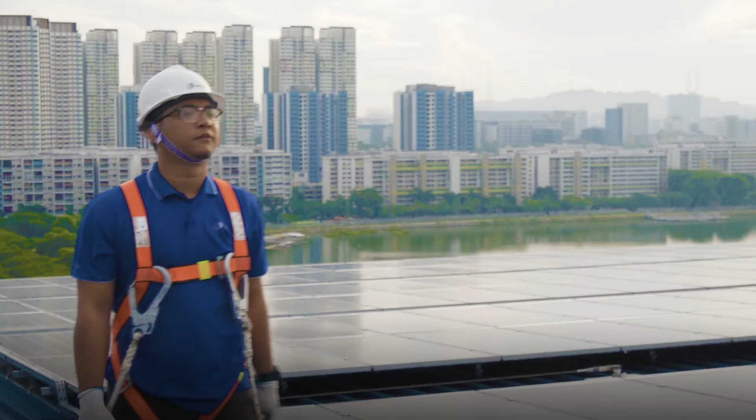I'm from the Energy Research Institute of NTU, managing two programs directly related to this workshop. The first is related to multi-energy, and the second is about the power grid. Why present these two programs together? Because tomorrow you'll see that the power grid, districts, and large sites are somehow connected and interlinked.

The first program relates to districts or large sites hosting different energy types and sources — that means renewable and non-renewable, power, and thermal energy — with the following question: how can I reduce my CO2 footprint? How can I cut my cost?

The second program is about the integration of renewables in the grid. Integrating renewables in the grid is not an easy story. There is a limit somehow, and it creates a lot of instability. So the question will be: what is the impact of renewables on the grid, and how will the grid behave?

We also have to look at it from a business perspective — are there new businesses coming in with this big change of paradigm in the grid? The presentation will cover, and I hope answer, most of these questions. What's nice is we'll see the concept, but not only the concept, also the implementation — that means we'll have the voice of the project managers who are today implementing these projects. I truly believe it will be a very fruitful session, and I'll immediately introduce John.

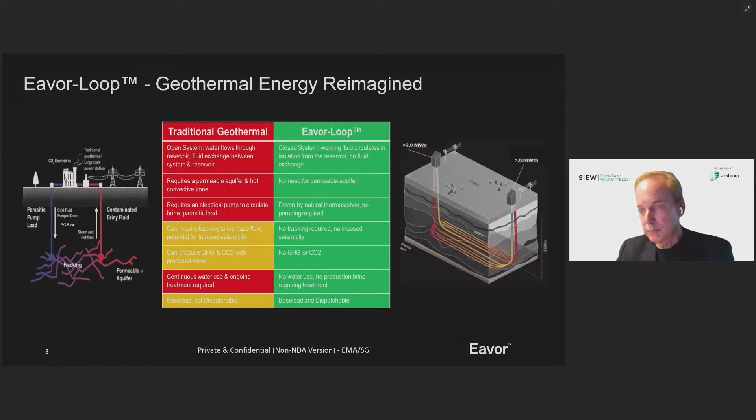And the subject of a much, much longer presentation than the 5 minutes I have today. Next slide, please, page 4.

Thank you. The end result of all this development is the creation of what we feel is a previously unknown energy category that is simultaneously truly scalable, green, and baseload. No other energy source does this.

And on top of this, unlike any other green solution, ever intermittent, it can act as baseload, even better than that. And unlike traditional geothermal, it's even dispatchable and can load follow, which can certainly help with grid stability, one of the things you were just mentioning, Sharif.

In fact, with no emissions, no water treatment, no seismicity risk, and a small surface footprint, it's the most benign form of energy imaginable. Being benign and scalable also makes it distributable, another virtuous attribute.

Similarly, being distributable, black start capable, and mostly buried underground, it's also an extremely resilient form of energy against natural disaster, man-made or natural disasters.

Finally, unlike wind and solar, it can effectively deliver heat and/or electricity, not just one of the others. It truly is the holy grail of energy sources. Next page, please.

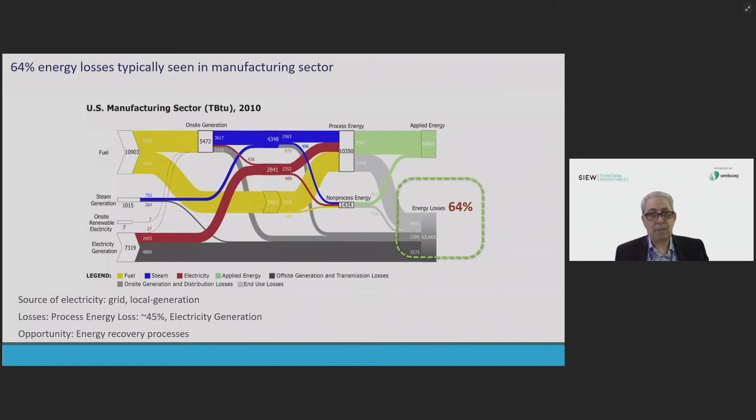And when you put all this together, you see that we lose 64% of our energy. So what can be the value proposition? We have to find a system that enables us to completely manage all these energies as a whole. That means we have to find a way to couple them.

So we have developed a system that I'm introducing called Smart Multi-Energy System. This system will have the mission to be able to dispatch energy, or the mix of energy, to reach an acceptable cost and to reduce the CO2 footprint. That means the system will give orders to the different sources of energy, alternatively, in parallel, or sometimes together, to supply the power to reach the minimum footprint of CO2 and obviously of cost.

So the project we have decided with Jurong Port, with JP, we have 3 targets: energy saving 20%, cost saving 30%, and CO2 footprint less 20%.

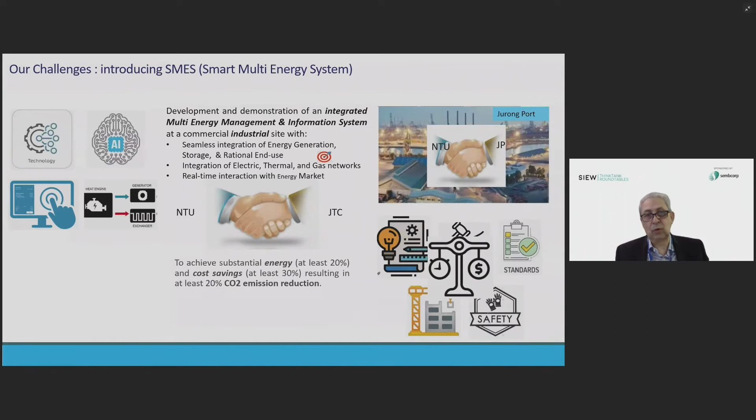So just a picture of a harbor. It's a multi-purpose harbor, 40,000 vessels a year, very big land. But what you'll see when we go into the harbor is how rich this harbor is in terms of load for us. The harbor is also 16 megawatt, but notice that 10 megawatt are coming from solar. So it's a very peculiar harbor. We'll go more in detail later in the presentation.

So what is the solution? The solution obviously comes into 3 parts. I will call it a software suite. Today, the system is not a prototype - we are not speaking of prototype. The system is running in Jurong Port. So the system has 3 pieces. The first piece is the design.

So we start to plan. We want to reach some targets in terms of CO2, in terms of CapEx. We have to reduce the CapEx, and in terms of operation we have to have the lowest OpEx. And we have to find the best acceptable efficiency, taking into account the CapEx and OpEx we want to reach, and the CO2 footprint that we want to get.

So first, we have a first tool. This tool is capable of helping us design our site and make the choices in terms of what different pieces of equipment will contribute to the targets. So the first one is a design tool. What is the output? The output is a bill of material with a list of equipment reaching the CapEx, the OpEx, and the CO2 footprint that you want to get.

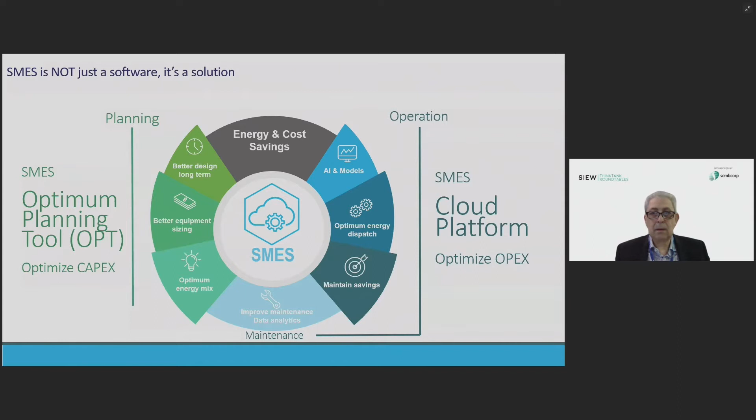On the other side, we have many rooftops with up to 9.6 megawatt peak solar power. We have obviously a storage unit with batteries. We have an AC/DC grid, so we have protection with AC circuit breakers. All this has been developed by ERI@N. We have obviously a PV optimizer. And we have a microgrid controller.

And then we are also experiencing trading of energy. So we have the grid, but also we have solar PVs - Sembcorp is our partner for the solar energy. And then we have also a gas pipeline. We have a cogeneration, and with the cogeneration we have also an absorption chiller and thermal storage. And here you see really a real example of multi-energy, multi-sources.

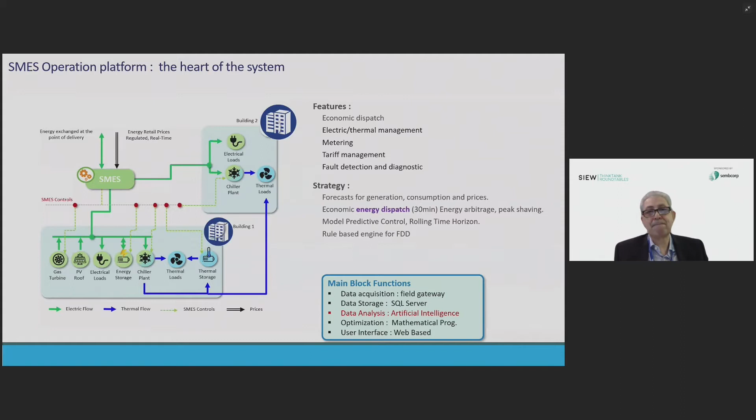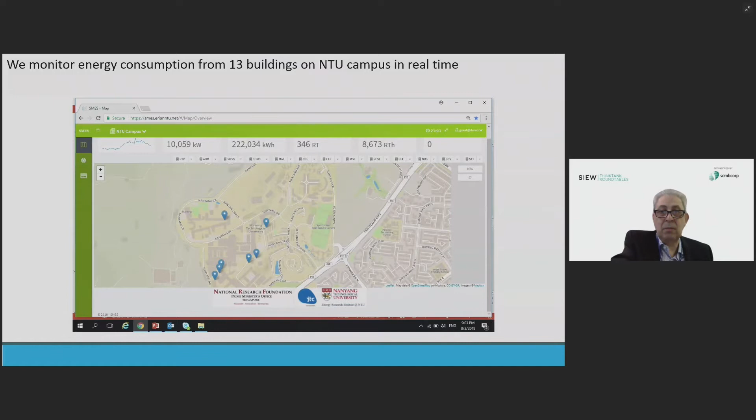So we can see one building with the sum of power consumption and whatever on the building.

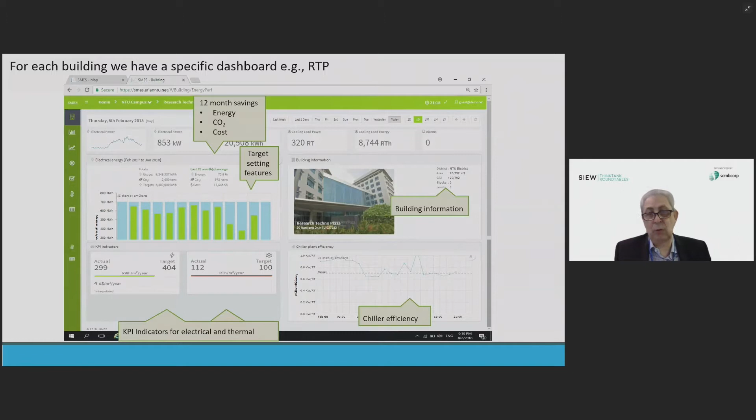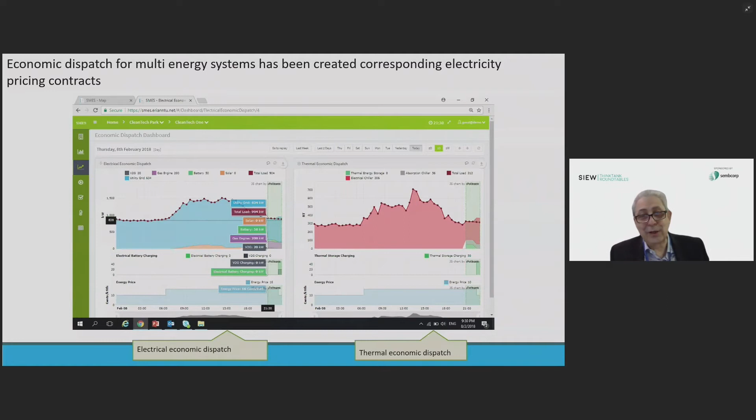I believe the next slide is about the accuracy. So here you can see the accuracy - we are very good in our forecast. Obviously the solar forecast is definitely not at the same accuracy as the load and supply. But this gives you, in a nutshell, a quite clear view of our project.

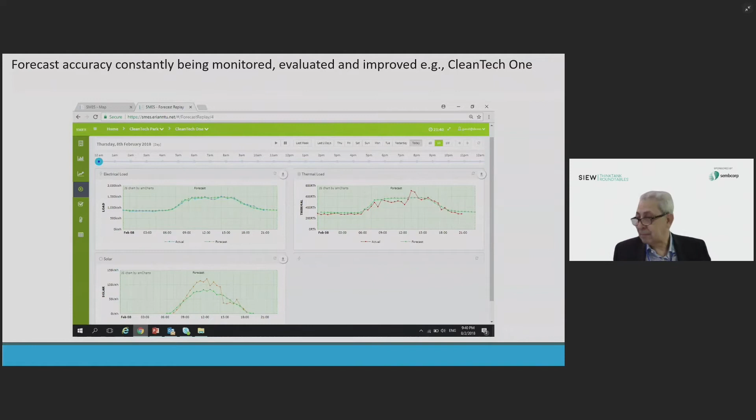I believe my time is up, and it's time to ask Mr. Parik to make his presentation. Very quickly, Mr. Parik is a senior manager in Jurong Port. He's our day-to-day partner in this project in Jurong Port. He's at the heart of the design team, and also at the heart of what will become Jurong Port in the future - he'll explain it better than me. It will become a living lab for all Singapore to conduct thermal and power experiments. He'll be covering the topic of the next generation multipurpose harbor, because we are really into the future once we are into JP Jurong Port.

Go on, Parik. Hi, good morning all. I would like to thank NTU as well as EMA for inviting us here and sharing our journey about innovation and sustainability. Next slide, please.

The presentation today is designed to give you context of the port first, so we'll help you understand the energy landscape in Jurong Port, and then we'll talk about how we have approached innovation and sustainability in terms of application at both micro and macro level. Then we'll talk about SMES as a key vector for making Jurong Port a next generation multipurpose port. This is to give you overall background - I think Sheriff has really articulated SMES very well, so I'm not going to delve too much into the detail, but generally this should help you understand the overall project itself.

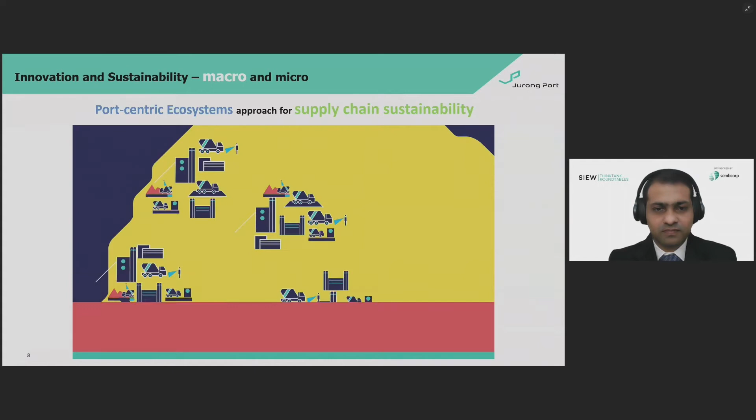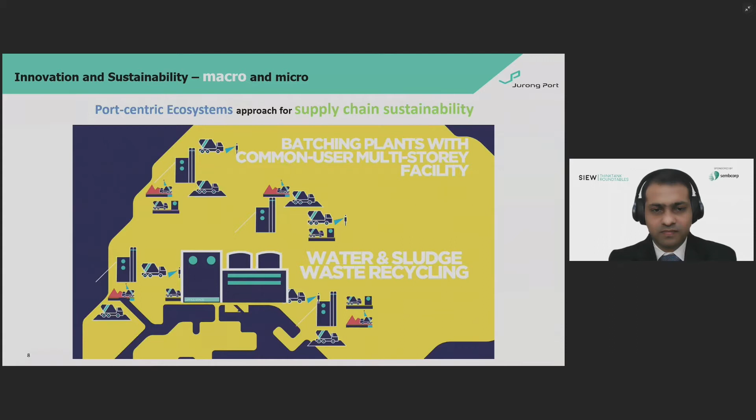Through a one-stop facility, JP will integrate and provide a common user, multi-story facility for shared requirements such as office space, water and sludge waste recycling, weighing, truck washing and maintenance areas, as well as parking spaces. With such a facility, port users can tap on economies of scale to invest in next-generation automation and environmental technologies. By providing an efficient and enclosed storage under shelter for aggregates, this will further reduce land usage by about 5 hectares.

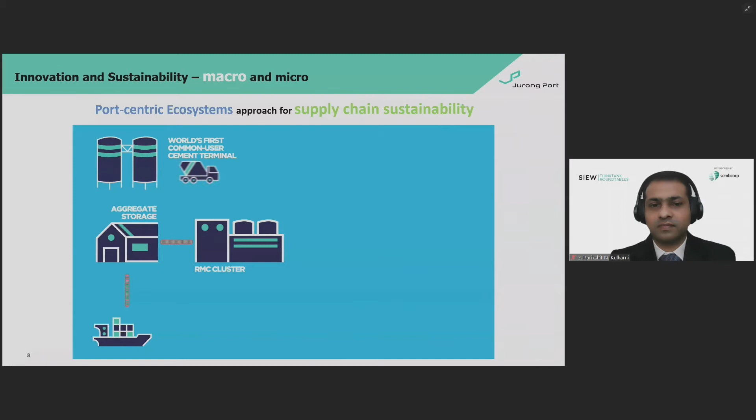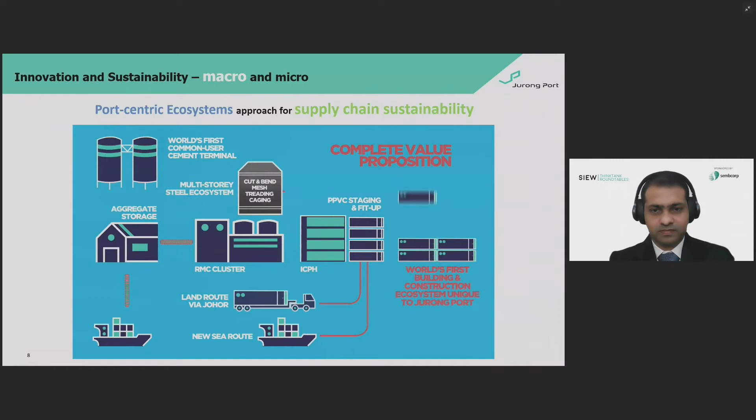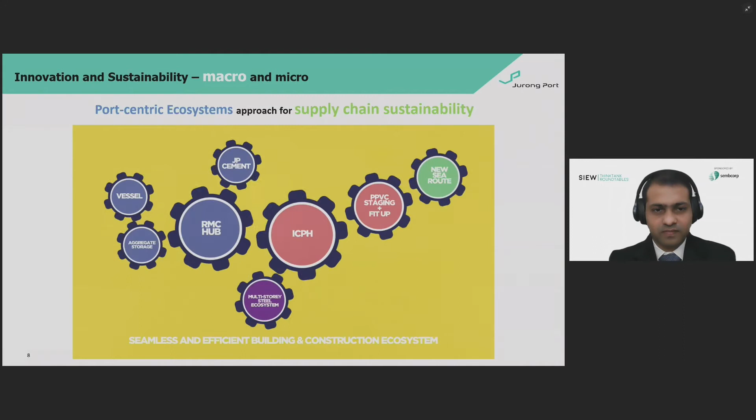JP is the expert in advanced bulk cargo handling methods. Fully enclosed and highly automated conveyors will fetch cargo from the vessels directly to the facility. Dust control systems will minimize any pollution. With cement, aggregates, batching plants, and all other necessary requirements connected to each other, Jurong Port's ready-mix concrete ecosystem will pave the way to transform Singapore's building and construction sector by leveraging advanced technologies. In future, the facility can scale up and reap even greater synergies with prefab and steel clusters. The RMC ecosystem, creating value for Singapore's construction industry.

Yep. Thank you, guys. Hope you can hear me again.

In this particular video, you would have noticed how bringing up different industries nearer to the port has strategically helped reduce so many truck trips. In fact, just for this case of RMC itself, it's about 600,000. But as we develop more ecosystems like the steel that was mentioned, and PPVC and prefab hub, we can easily cross more than 1 million truck trips on road. And that really translates to a lot of carbon emission savings here. Now, this is a very strategic approach on a macro level.

Another example, if you can click the next slide, is this study and venture that we have now gone into together with Chiyoda and 6 other corporations, which is looking into hydrogen as a next generation fuel. And again, Jurong Port being, like what Sheriff had mentioned, a living lab, we are now joining hands with the industry to test bed and also to look at how hydrogen can be landed in Singapore. And with this, basically, we can make the grid itself cleaner.

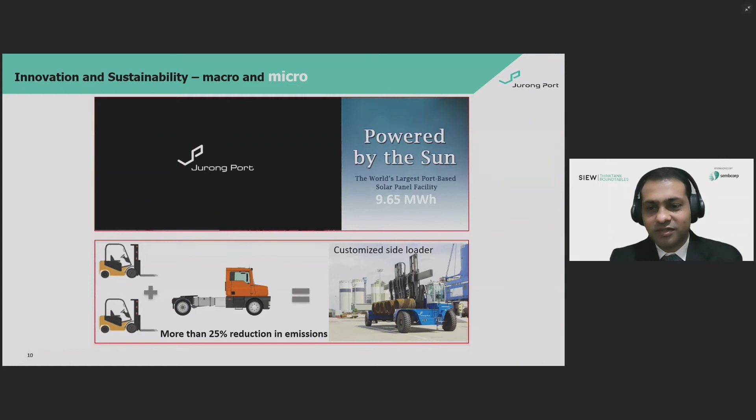This is where I'm going to talk about how SMES has played a key role in making Jurong Port the next generation port, because as we operate this 155 hectare facility, we need to understand the DNA of energy inside the port, and this is where SMES comes really handy.

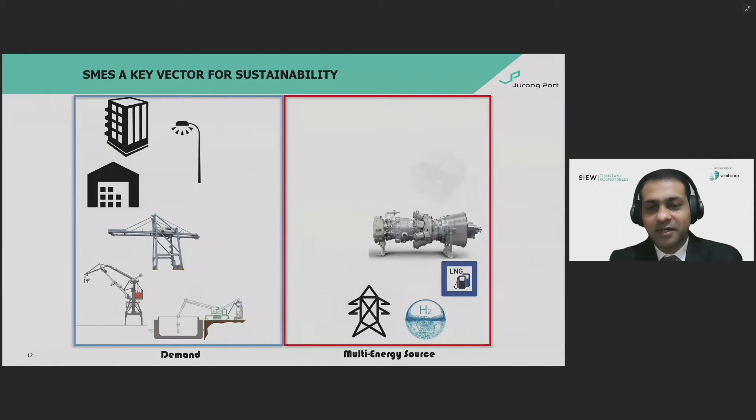So you can see now on the right side in the red box, how we are going to look at various energy sources, which can then combine together as a power bank for us to be activated through the response and demand from the energy market and the data that we receive, which will be processed in a central platform, which can then help us make business decisions that are driven and supported by the data and analytics from SMES.

So this is exactly where we are coming from. SMES is going to be the platform to give us the insight, both predictive in terms of our energy loads that are going to happen, and make the right decision based on the energy market prices every half an hour.

And make that call to then see whether we run our gas engine, or buy from the grid and use it to charge our batteries, or pump our solar into the grid because the grid is paying better. And this is exactly where what Sharif was mentioning about reducing carbon is one aspect, where we can introduce hydrogen into the system.

We can harvest solar in a much more efficient way. That is one part. And the second part was actually making business decisions which are data driven in order to then have, I would say, commercial savings.

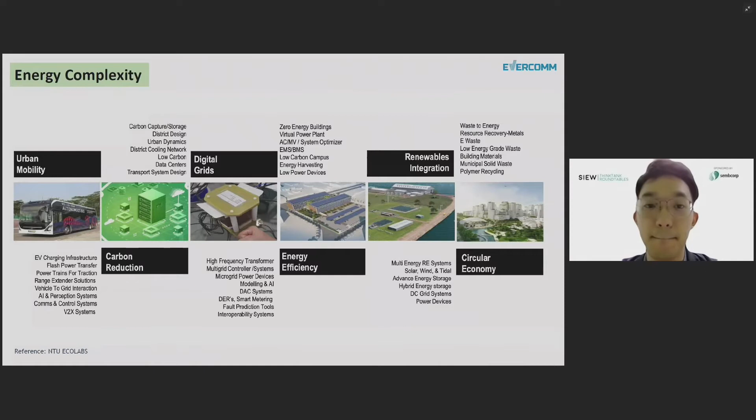One of the projects that we have done is actually with ERIAN, as well as a public listed company from Taiwan. They're one of the largest power electronics and power supply manufacturers.

As a company entering into this space, we realize that hardware, physical hardware, at the end of the day, are the enabler pieces for a lot of these software abilities. Even without these enabling hardwares, a lot of the things we want to do at the software level will not be able to translate into real savings or real output.

But if we as a company want to directly work with a lot of these bigger conglomerates, it will be almost impossible. This is where you can leverage on an open system innovation approach by partnering up with universities like NTU and ERIAN, and working with conglomerates who are very strong in power electronics and power supply products, while a startup can come in to focus on the software aspect and the innovation business model. I think this kind of collaboration can really shorten the product to market phases.

So in this particular collaboration, we're developing bidirectional inverters that can help us better do a lot of the market trading activities when the market begins to open up.

In terms of the scope of the collaboration, the main IP actually comes from the universities, and the startups are much stronger in developing platforms, software, and algorithms. The big manufacturing companies are really good at cost down and making sure the hardware prototype can really be scaled for, and be ready for design for manufacturing.

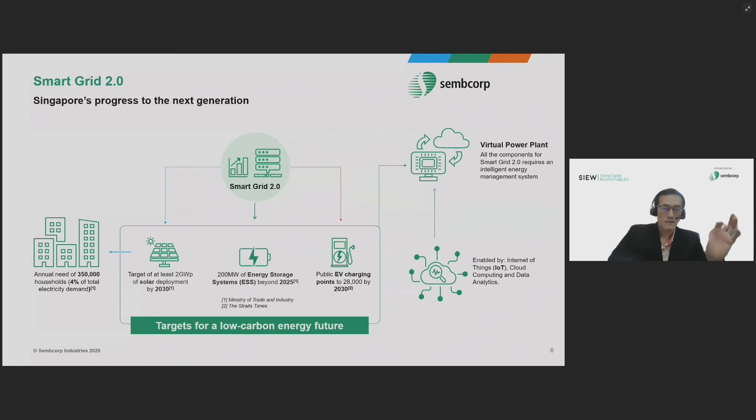In a nutshell, the virtual power plant that we envisage centers on aggregation. What are we trying to aggregate? We aggregate idling assets that are not able to participate in the market efficiently or cost effectively. If we build a digital platform to accumulate these small idling assets and enable them to participate in the market, that will save a lot of potential investment and land area, and also improve the quality of electrons that consumers enjoy.

I have a video to fully describe the virtual power plant we are developing together with our partners. So, the video.

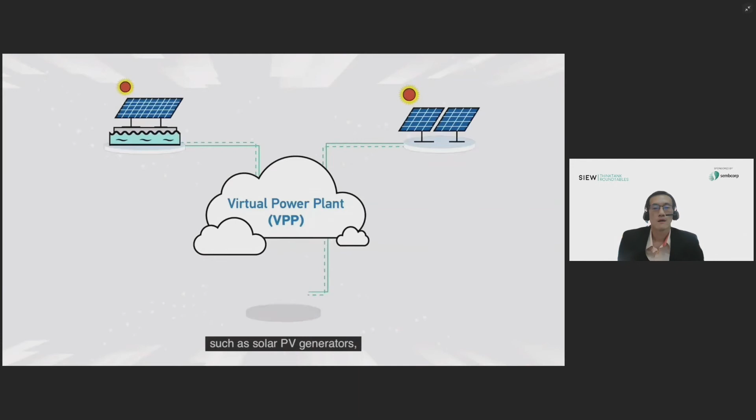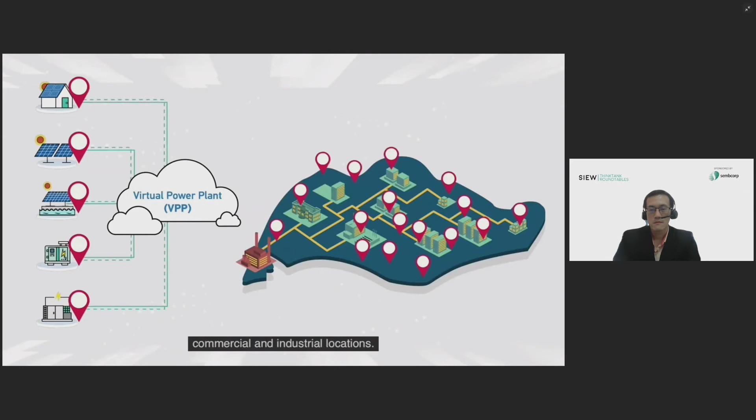A virtual power plant aggregates and manages distributed energy resources, known as DERs, such as solar PV generators, energy storage, and gas generators, as well as building loads. Up to thousands of these assets can be scattered across residential, commercial, and industrial locations. This portfolio of energy assets, combined into a single entity, operates like a conventional power plant.

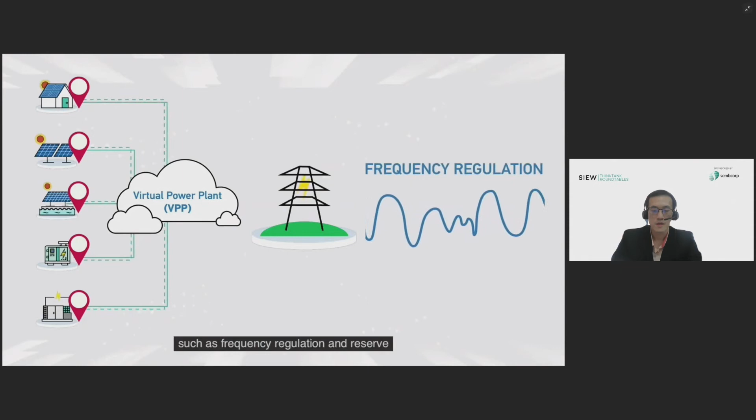It brings new opportunities to DERs by allowing them to participate in the energy market, including grid ancillary services such as frequency regulation and reserve, to enhance grid stability. A virtual power plant brings value to the regulator, asset owners, traditional utility companies, and the consumer.

A VPP facilitates a more diversified and dynamic energy market by enabling cleaner energy sources into our energy system. For asset owners, a VPP captures more value from DERs by enabling market participation, thus bringing higher returns and encouraging investment into renewables. The VPP enhances grid stability with services to better match supply and demand, allowing traditional utilities to better plan and optimize production efficiency. A VPP increases DER returns, thus encouraging more renewables installation, leading to a cleaner and more sustainable energy supply, ultimately benefiting the consumer.

Energy Market Authority of Singapore and Sembcorp Industries Limited, in collaboration with the Energy Research Institute at Nanyang Technological University, have embarked on building Singapore's first virtual power plant. This project aims to contribute towards Singapore's efforts to meet its climate change commitments by allowing more clean and distributed energy resources, such as solar, to be integrated into Singapore's energy mix.

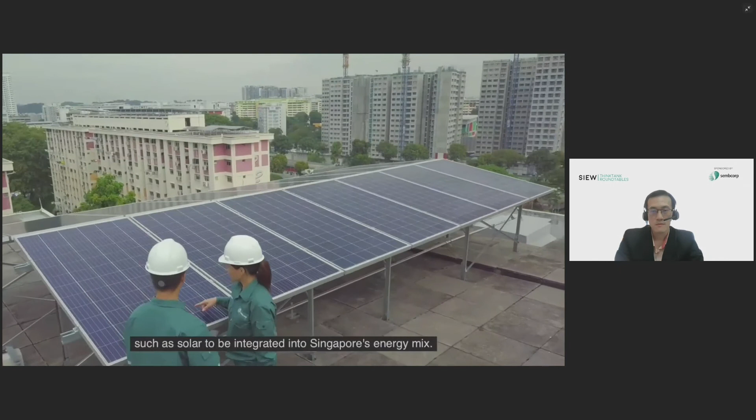Our research leverages recent developments in information technology, such as large data transfer in real time, advanced forecasting with smart algorithms, as well as innovative strategies for optimum dispatch. Using data science and machine learning algorithms, we target more accurate predictions for solar power generation, building load demand, and electricity price forecasts.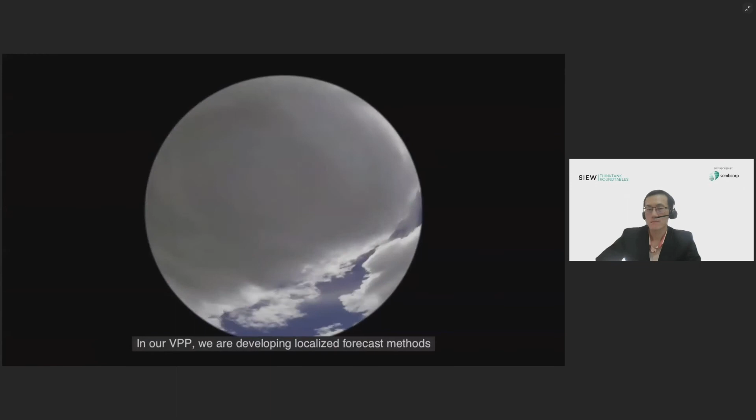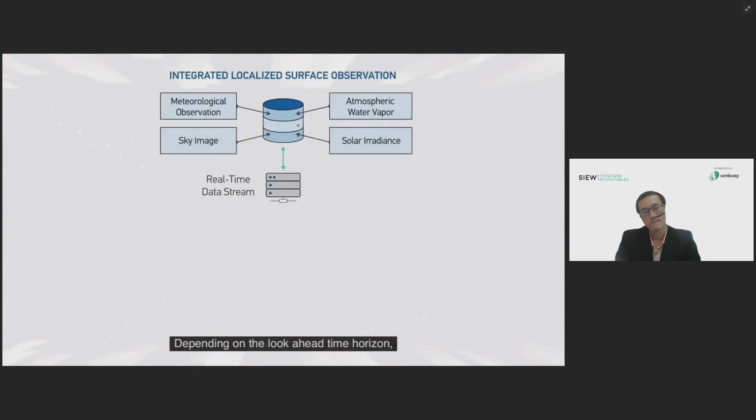In our VPP, we are developing localized forecast methods using sky cameras and various weather sensors to achieve higher accuracy results. Depending on the look-ahead time horizon, these parameters can improve existing forecasting algorithms to give a better prediction on the solar irradiance profile.

Our optimization algorithm takes in the various forecast profiles and computes the optimum power dispatch for each of the energy assets for a future time horizon. This enables the energy assets to operate optimally for maximum return.

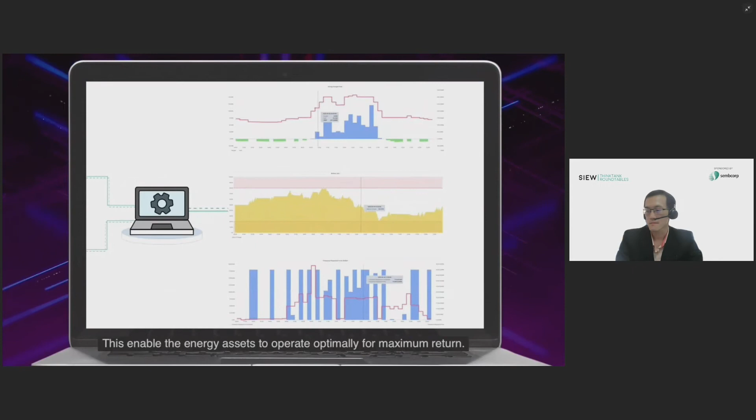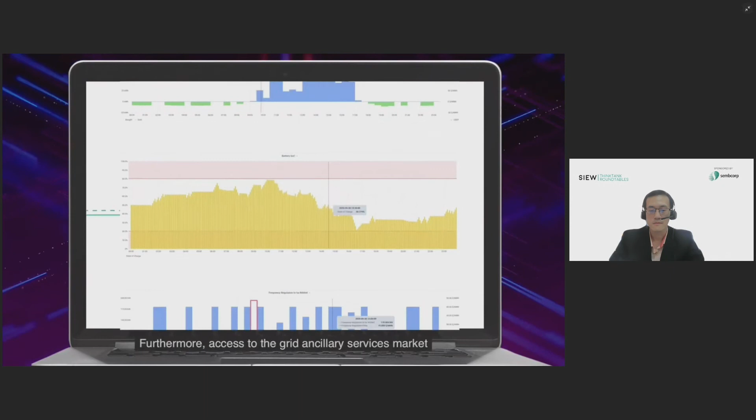Let's take a look at the projected dispatch profile of the energy storage system. We can observe that energy is purchased to charge the energy storage at low prices and sold at high prices in the energy market. Furthermore, access to the grid ancillary services market offers opportunities to generate additional returns. Our algorithm considers the potential value streams of different grid services to optimize the energy storage utilization.

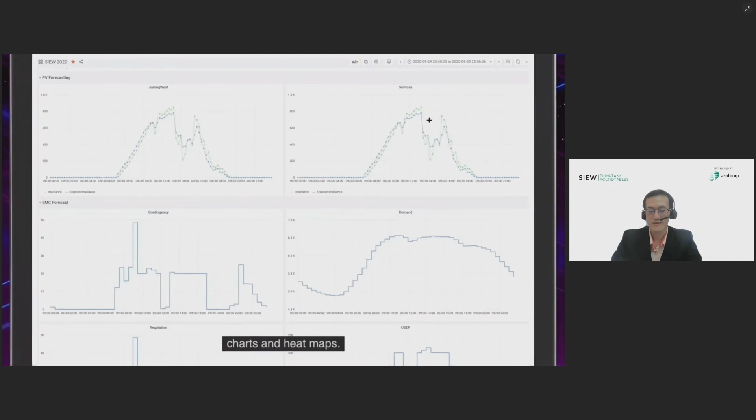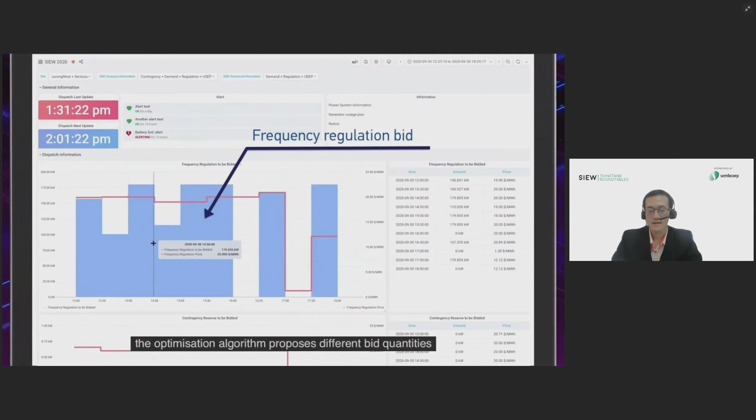Our user-friendly trading advisory dashboard offers comprehensive information in the form of tables, charts, and heat maps. Here are the charts showing the grid services to be offered by the VPP for the next 24 hours. For the frequency regulation service, the optimization algorithm proposes different bid quantities based on the price profiles and the state of charge of the energy storage.

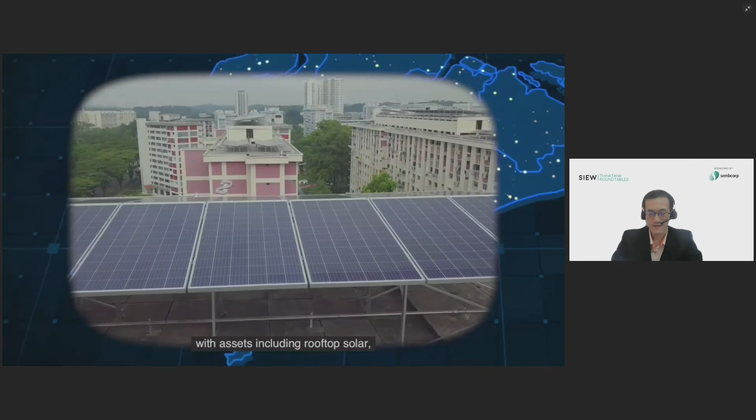On completion, the virtual power plant will include 4 locations spread across Singapore: 2 residential sites, 1 recreational facility, and 1 industrial site, with assets including rooftop solar, floating solar, as well as large-scale energy storage systems. This project will serve as a blueprint to bring this technology to future large-scale commercialization. We hope the knowledge gathered and shared through our research and implementation will help diversify and improve Singapore's energy market. Join us to create a more mature and resilient energy market.

Apologies for being lazy to present on the spot by using a video, but I thought the video would capture the full story.

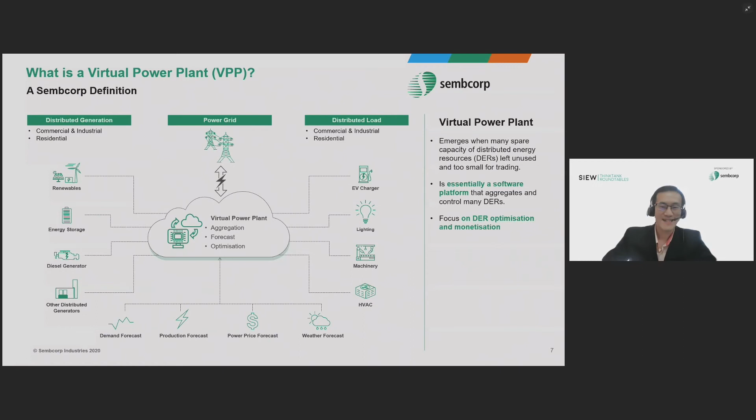Besides some of the applications mentioned just now, there are many other applications we can build on top of the virtual power plant, especially ancillary services, but also merchant applications that we foresee gaining more traction. May not be in Singapore yet, but already seen overseas. In this 2-year program with ERI@N, we are not going to build everything. That's why we are urging potential collaborators to jump on this wagon to work together with us to realize Grid 2.0 of Singapore as early as possible.

However, this journey is not without challenges. There are plenty of challenges when it comes to technical, market, or regulatory issues. Some examples: currently in terms of the metering scheme, there's no suitable metering scheme when it comes to a few generators at one site. The current system is such that there's only one generator per meter, maximum two.

So how are we going to overcome this? There's a need to change the technical receiving part at the other end of the grid system. Communications currently, for example, everything in order to make it secure for frequency regulation specifically, we need to use pilot cable, which is physical wires. Can we do something else?

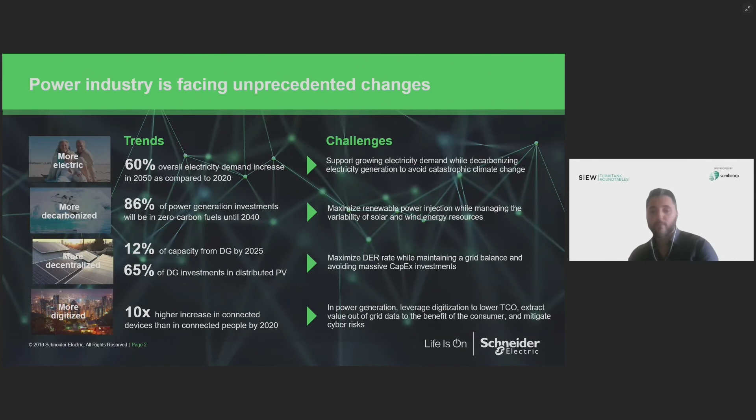If you can move to the next slide, please. So Schneider Electric is a very big company, present in every part of the world. In terms of utility, we are mostly focused on distribution utilities. So we did interview all our distribution utility customers worldwide to understand better what were their challenges and what they see, what are the challenges that they see moving forward.

So there are 6 major trends which prevail. Number one, if we go one by one, it's about changing the regulation and the policy. The distribution utilities worldwide are strongly regulated, whatever the market model. And the utility regulation was invented in the late 19th century, and it was not really meant for decentralized power systems with renewable. So regulatory evolution is on the horizon, and it generates uncertainties, which impact the investment strategy, the revenue model, and the associated risk management.

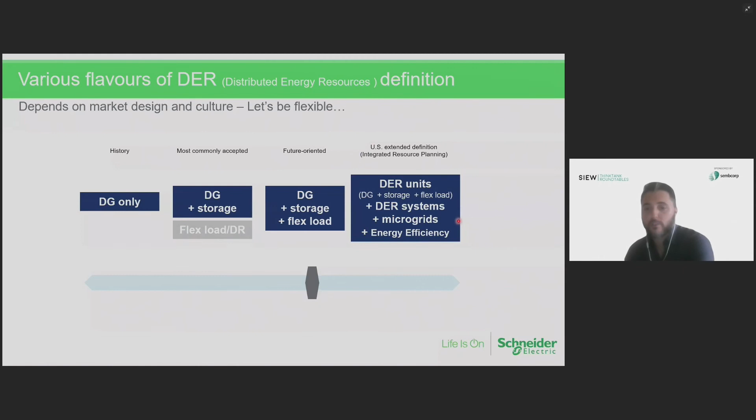The UK also has an aggressive policy for DER. They position themselves just after the top 3, and we qualify them as medium penetration. I would say most countries do not feel the heat to the same extent yet, still with a rather low penetration rate like France. They have more time to prepare for the new model.

DER integration is in fact a two-fold story. It's a network integration part, based on control room technology that we'll discuss later. It's about new planning strategy and tools, as well as increasing DER hosting capacity, avoiding overspending on the network and avoiding congestion of the network. There is a second part of the story, which is wholesale market integration, trying to bring demand response and small-scale renewables flexibility into the market, which requires aggregation and VPP, as we have seen before.

As we have seen, some countries are already feeling the pain of that DER integration. There are indeed a lot of operational constraints with DER for distribution utilities. DER can exceed the network limits and cause risks to system security. We speak about higher MV fault levels, reverse power flow, under and over voltage, overcurrent, among others. In order to solve those operational constraints, you need much more visibility on the network, more sensors, more automation, and more software.

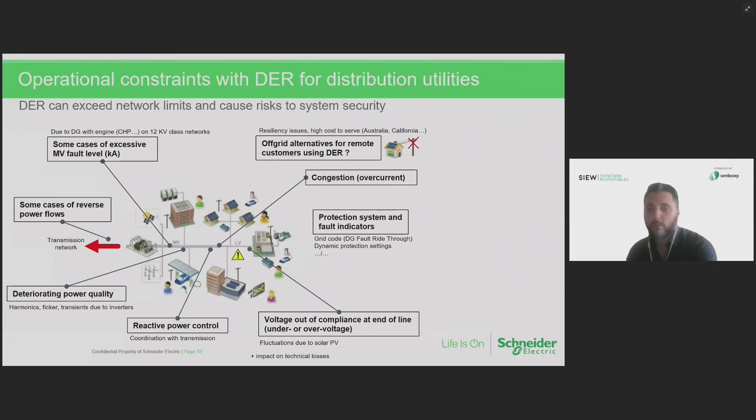So the software that can help manage those operational constraints, we call it DERMS. It stands for Distributed Energy Resource Management System. The DERMS will basically model the DER, monitor and forecast, as well as optimize them in order to maintain the stability on the network. This is what Anne is going to present in the next presentation. So with that, thank you very much.